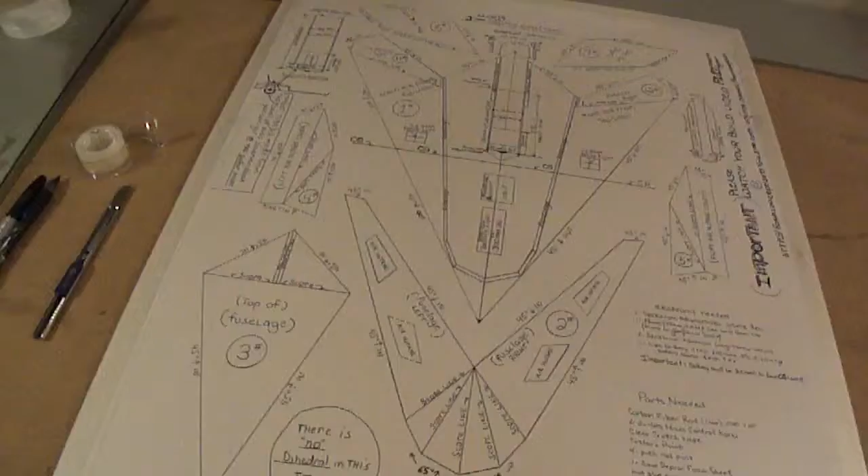Alright you guys, we're going to get busy cutting out our F-117 stealth fighter. You can use a 30mm or 28mm EDF jet.

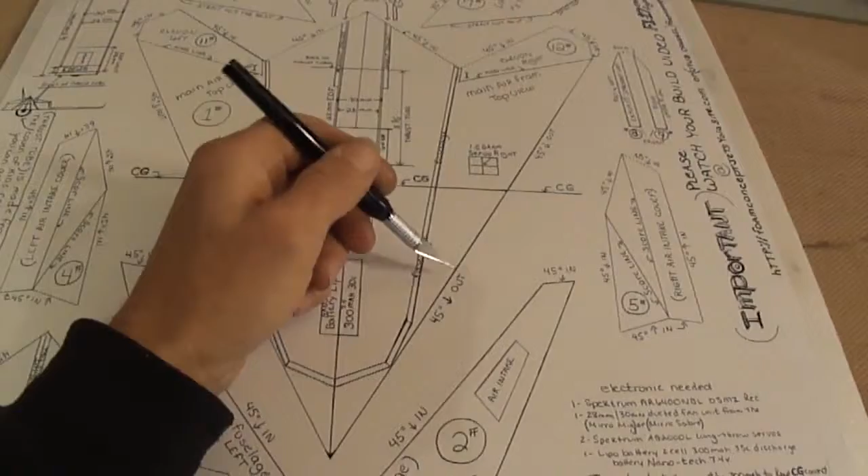I was going to go over a few things, which is I started putting on here '45 cut outward,' meaning you're going to cut on your line that way. And anywhere I've got it marked as '45 in,' that means you cut in. I'll start putting this on all my plans, that way it makes it a little easier for you.

Alright, let's get started. I tape my sheet down on my foam board.

Like I said guys, always use the bow. Put the crown at the top. These sheets come with a little bow in them, so you want the crown at the top. You'll see one side of the sheet is smoother than the other, but I always like to put the crown at the top. It makes the plane, when you build it, give it a better airfoil shape.

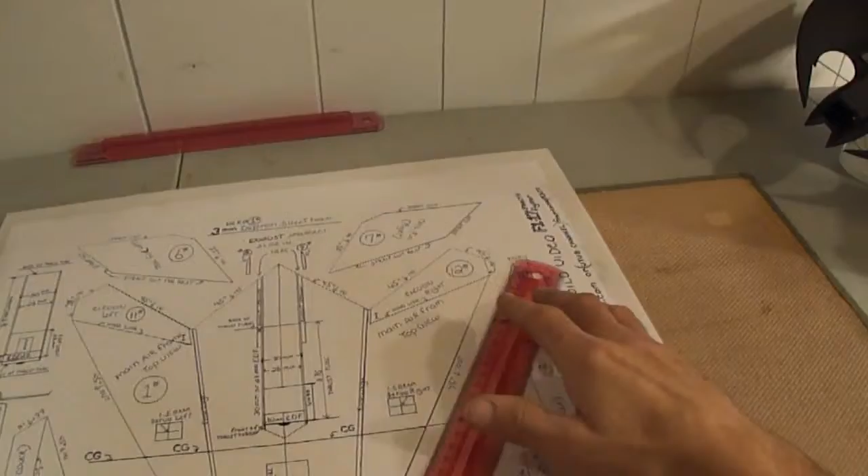Alright, let's start with the main airframe. I'll go ahead and cut this out. As you can see, it's a 45-degree cut with an arrow pointing that way, so we're going to put it on our line.

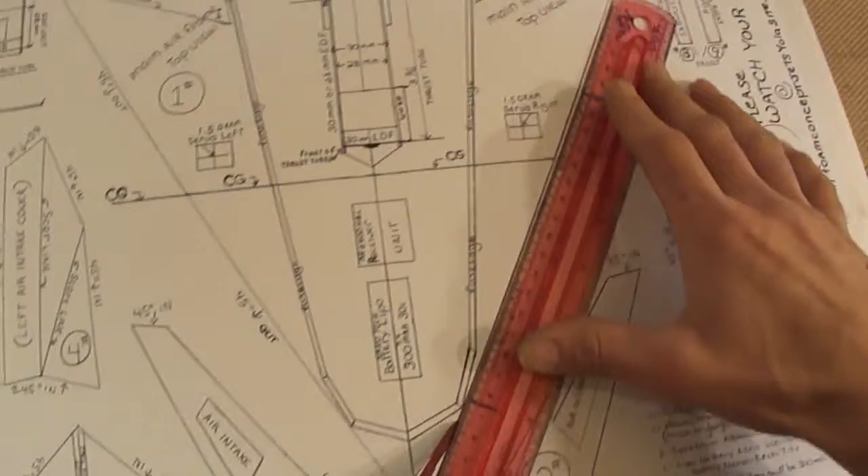Let me get a different knife. I'm going to go ahead and do my 45s on the main airframe first. I numbered all the pieces.

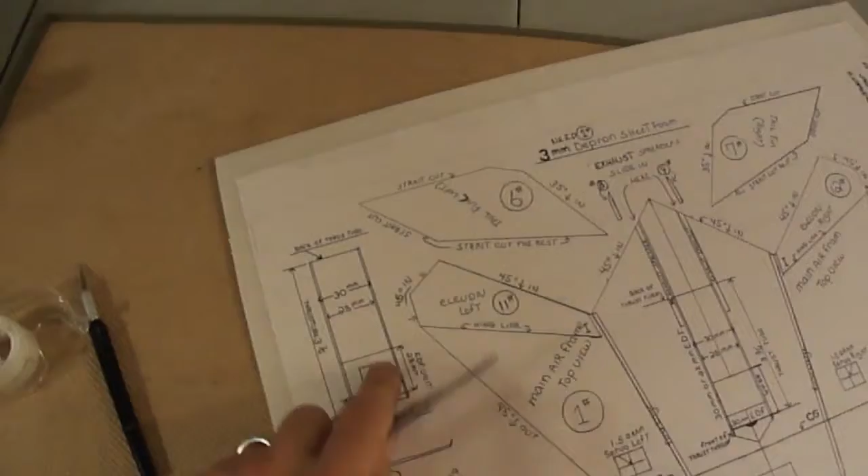I'm going to try to get through this a little quicker than my other videos too. Alright, for your elevons, those are 45 inward.

Turned out to be one cool jet. I love flying it.

Again guys, I'm just doing the 45 with the arrow pointing that way, so I'm cutting 45 in toward the inside of the fuselage, or the main body of the plane.

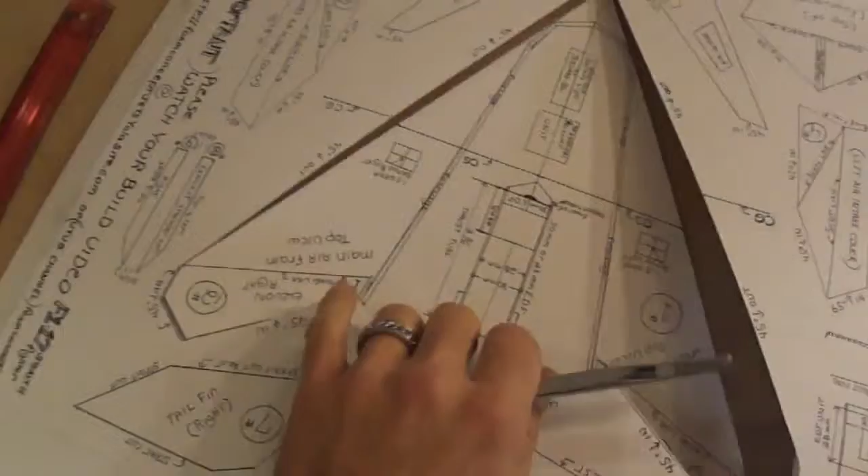Alright, so we cut out our main airframe. Just go ahead and put that off to the side.

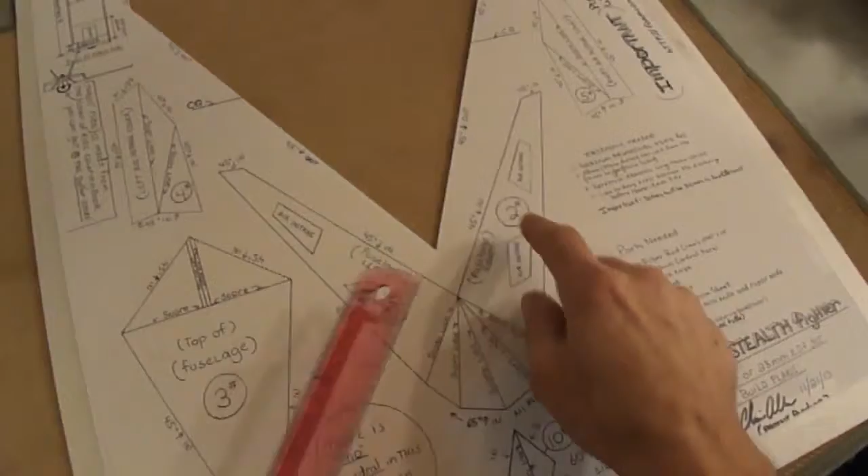We'll move on to piece mark number 2, which is your fuselage. Here we've got a 45-degree cut in toward the piece.

And if you guys want, you can do more than the 45-degree angle on some of these. I even got it marked in some places where there's a 65-degree angle cut. You can make it 70, 75 - kind of the more the better.

In. Right now I'm just working on the main fuselage part.

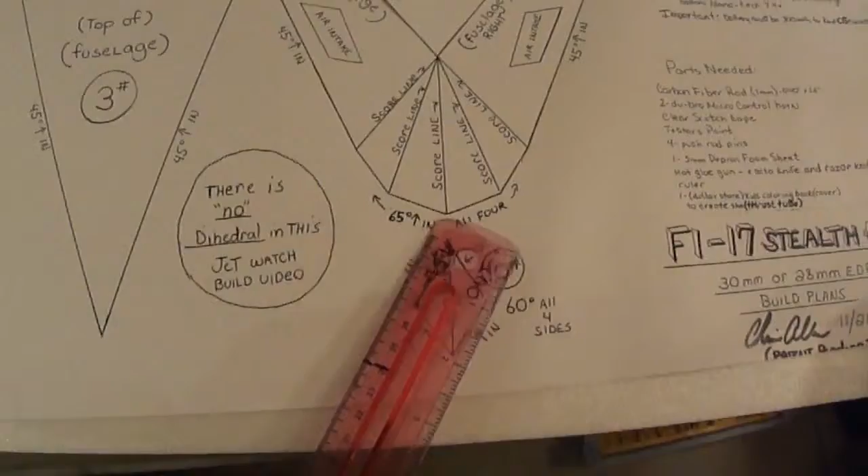Alright, now these are all on the front of your fuselage, which is kind of your canopy front end here. We're going to do 65-degree cuts, all 4 of these, angled inward. Like I said, you can make them a little more too. So if you want to go 70-degree.

Alright, now on these canopy lines here in front of your fuselage, you're just going to want to score them. I would only score about halfway through them too. You don't have to go real deep - just a nice little score is fine.

Again, I'm just scoring all these. You don't want to go all the way through. Don't care about that paper moving - already on it.

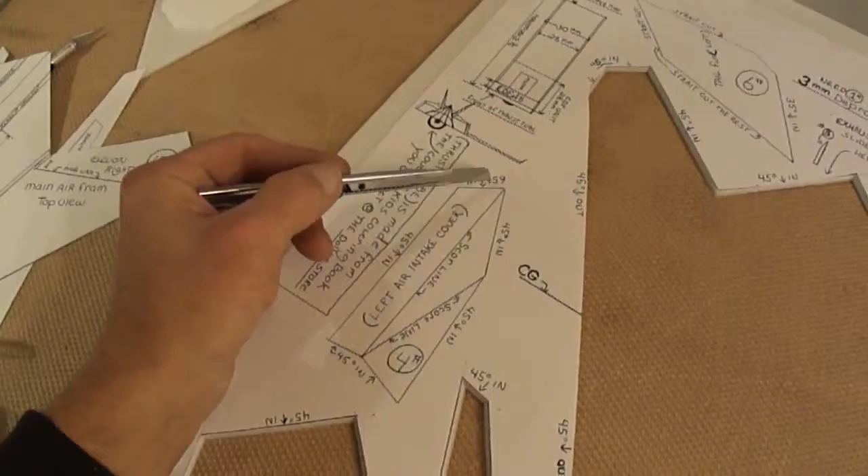For this piece, put our plans to the side here. There's that piece. Alright, let's move on to these left air intake cover. Again, there's some 65-degree cuts on here. I prefer you go more, so if you get like 70 or 75, that's fine. They got to be some nice angles on them.

So these are your air intake covers, that's what I call them anyway. Here's the 65-degree line, I'm going to go ahead and put a lot more, probably like 70, 75 degrees on there. Again, on some of these 45s, if you want to give them a little more, like 50, that's fine. Some 45s there.

Alright, so this is your left intake. I got some lines there that you got to score. Just score across those lines, again just not all the way through, just score them.

I'll get my X-Acto knife. I find an X-Acto knife works good on a lot of this stuff, especially for building the bat wing. It gets right in there on them cuts, and you can be a little more precise with them.

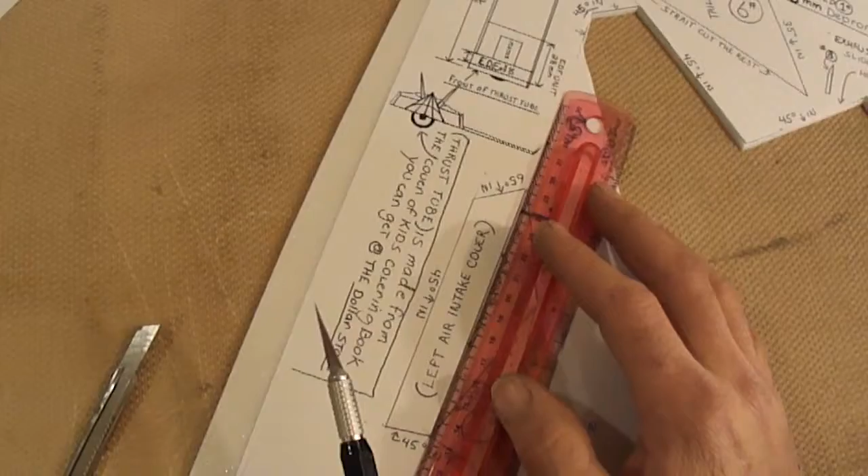So again, I'm just scoring these lines. Oops, I didn't finish my cut. Alright, there we go, there's one intake cover.

Now you can see where I scored my lines in the top of it. I'm going to take and flip this piece over, add a couple of pieces of tape to the back. Again, it's on the back side because you don't want to leave those lines open that you just scored. I just want to add this, make this piece a little stronger from behind here. Now you can take and break them where you scored them.

Try to get this out here so you guys can see. So there we had our top piece, our main airframe. These are going to be our air intakes.

Right, let's do the other side. This is the other, right hand side of the air intake. 45 inward, another 45 inward. Here's the 65, again just do 70 or 75. I really put my blade at an angle on these ones.

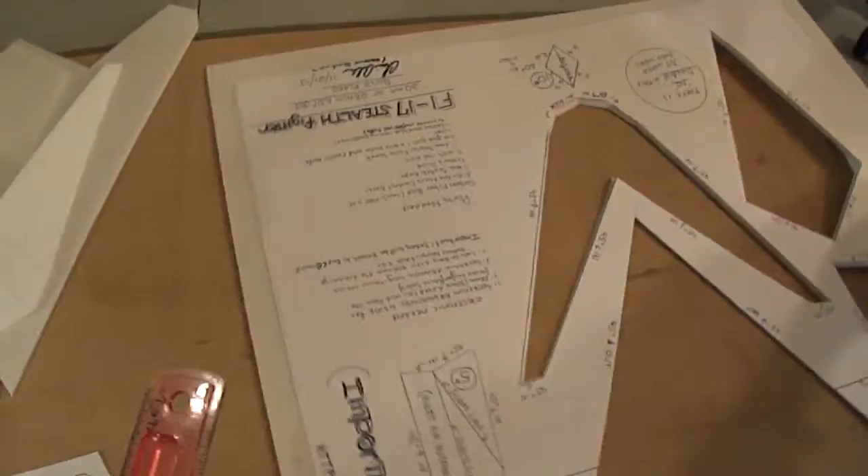And another 45. And another 45 in the front. Get these front pieces 45. Oh, that's right. Again, we're just cutting out the other side of the air intake. There's two of them.

Again, we got to score these lines. I'm going to go ahead and use my X-Acto knife, it's a lot sharper and it does a more precise job.

Again, let's take a... now you can see where this is going to break where I scored it. And you're going to want to take and flip your piece over, put some tape on this back side, keep your piece nice and rigid from the back.

So that way you can fold your piece around and get the shape you want. Alright, moving on to these tail fins.

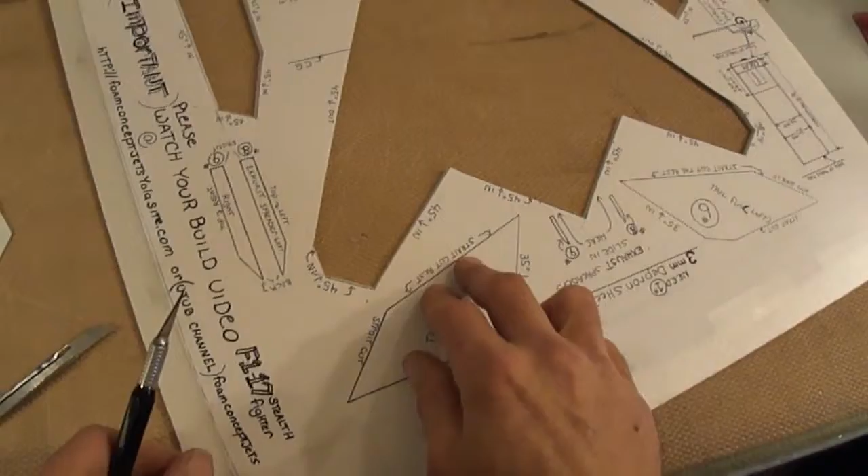Okay, I just straight cut wherever I got straight cut marked, the rest, that means just all the way around the piece. The only ones you want to cut at angles are the ones that are marked. Another straight cut. Here's a 35-degree angle cut on the bottom of these stabilizer fins.

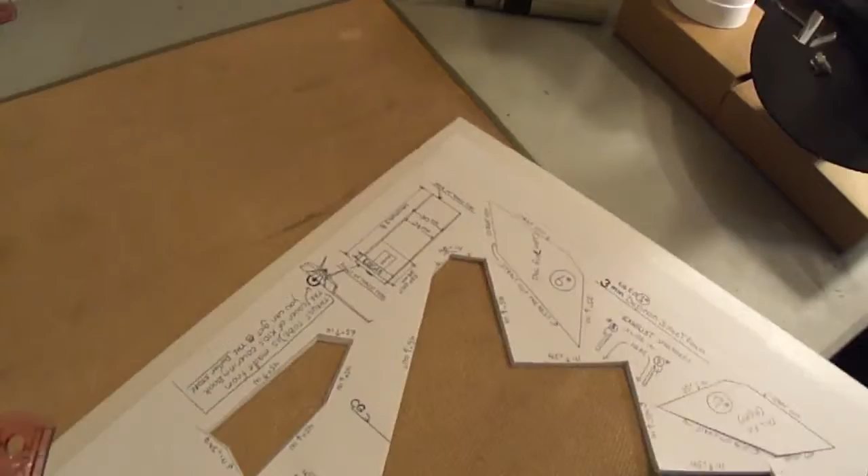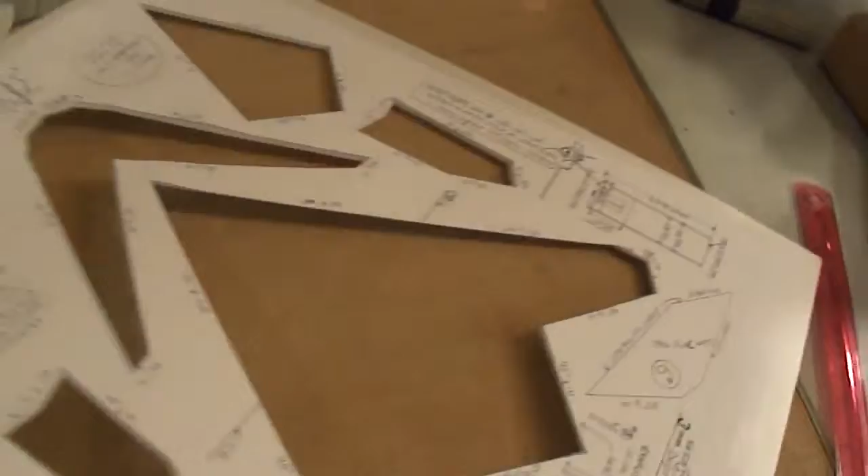If you want them to be angled slightly outward once you install them on your jet, so I'd just go less than 45 on that. Another straight cut in the back. Fin. Knock this other one out.

And the rest are just straight cuts on these tail fins. There's only one 35-degree angle cut on the bottom of them. The rest are all just straight.

Yeah, you guys are going to love flying this jet. It is awesome. Alright, so there we cut out all our pieces.

Main airframe, main fuselage, top of the fuselage, left air intake, right air intake, and then our tail fins. Oh, we got our little exhaust spreaders. They're going to go in the back, slide in through the back of the jet to keep open the exhaust in the back.

I'll just hurry and knock these out real quick. These are just all straight cuts.

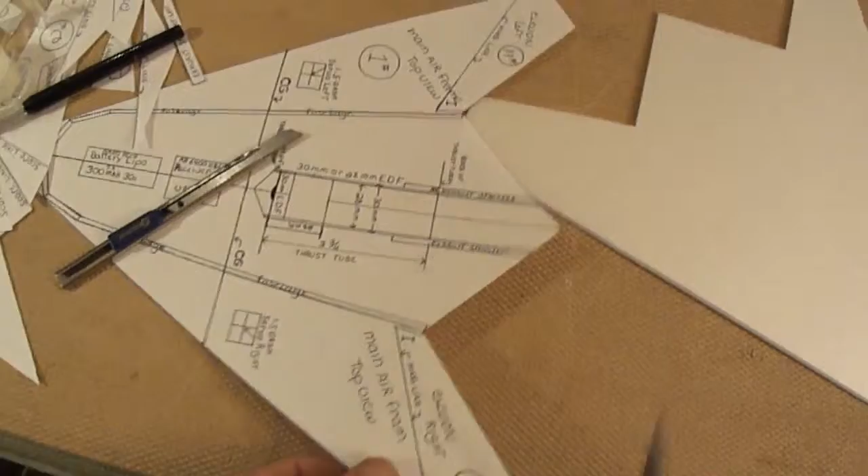Just gonna take and use my scissors. This is a hinge line here for your elevons.

And I'm just going to use one elevon because that's all you really need. Again, you can mark this the top of your airframe.

Because then you know it's got that bow in it. As you can see from the piece being bowed, it's still holding that bow. So I just mark it top.

Take your elevon over here, lay it on there. I just mark my corners. You can use the same one, just flip it over to the other side.

On there nice and match it up. You want your elevons to be the same size. Just marking my corners.

Alright, come back in here with your ruler.

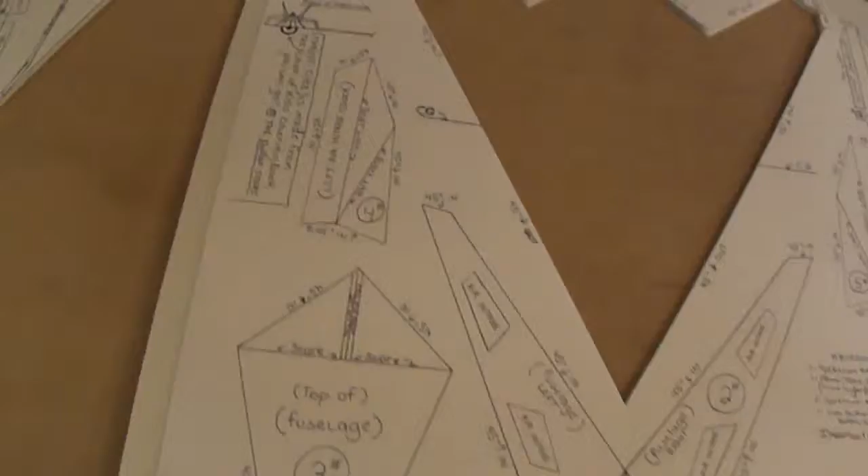So again, I'm just going to attach everything using clear Scotch tape. And if you guys want, you can do more than the 45-degree angle on some of these. I even got it marked in some places where there's a 65-degree angle cut. You can make it 70, 75. Kind of the more the better.

Right now I'm just working on the main fuselage part.

Alright you guys, we're going to get busy cutting out our F-117 stealth fighter. You can use 30mm or 28mm EDF jet.

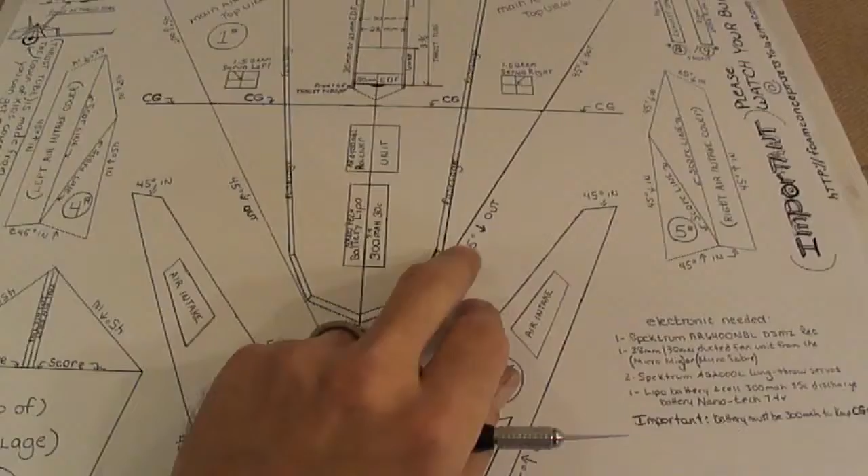I was going to go over a few things. I started putting on here '45 cut outward,' meaning you're going to go on your line that way. And anywhere I got it, you'll see '45 in,' that means you cut in. I'll start putting this on all my plans, that way it makes it a little easier for you.

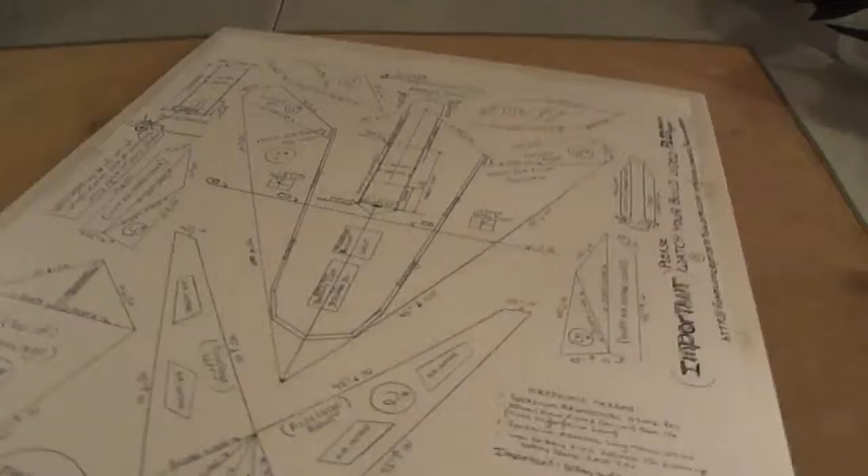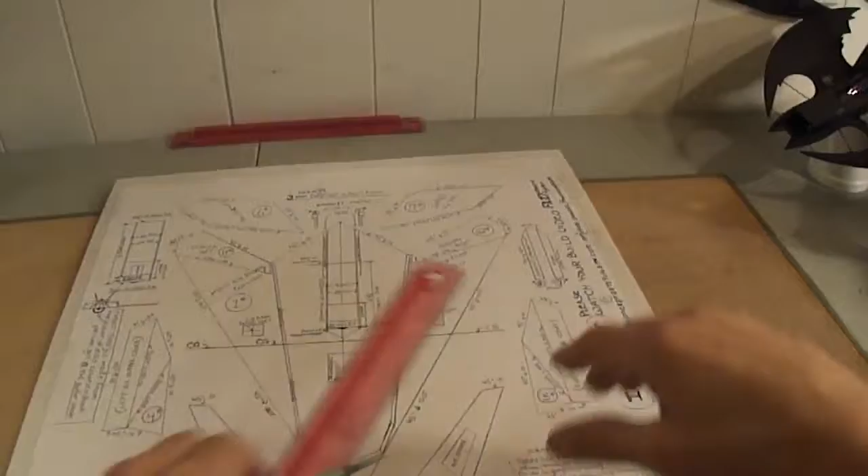But alright, let's get started. I taped my sheet down on my foam board. And like I said guys, always use the bow, put the crown at the top. These sheets come with a little bow in them, so you want the crown at the top. You'll see one side of the sheet is smoother than the other, but I always like to put the crown at the top. It makes the plane, when you build it, give it a better airfoil shape.

Alright, let's start with the main airframe. I'll go ahead and cut this out. As you can see, it's a 45-degree cut.

Alright, now these are all on your front of your fuselage, which is kind of your canopy front end here. We're going to do 65-degree cuts, all four of these angled inward. Like I said, you can make them a little more too, kind of the more the better. So if you want to go 70 degree...

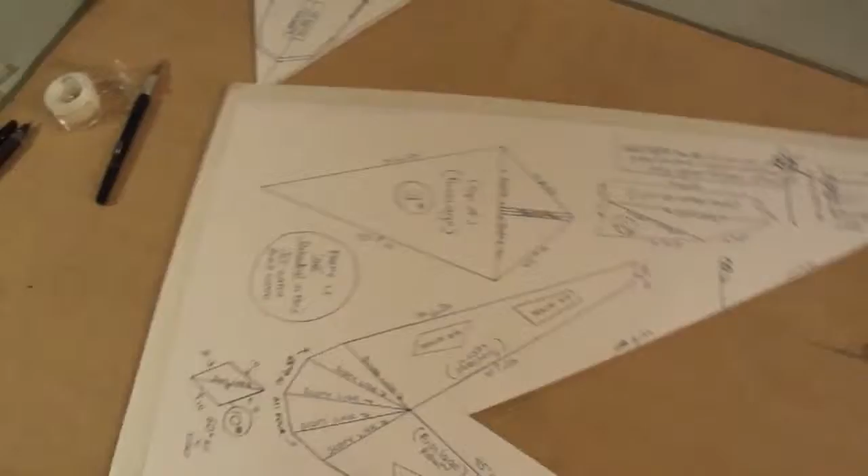Alright, now on these canopy lines here in front of your fuselage, you're just going to want to score them. I would only score about halfway through them too, you don't have to go real deep. Just a nice little score is fine.

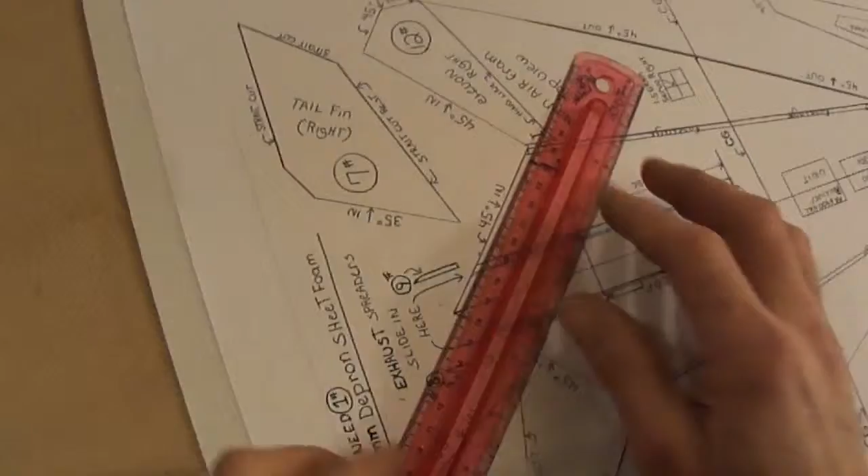Again guys, I'm just doing the 45 with the arrow pointing that way, so I'm 45 in it toward the inside of the fuselage, or the main body of the plane.

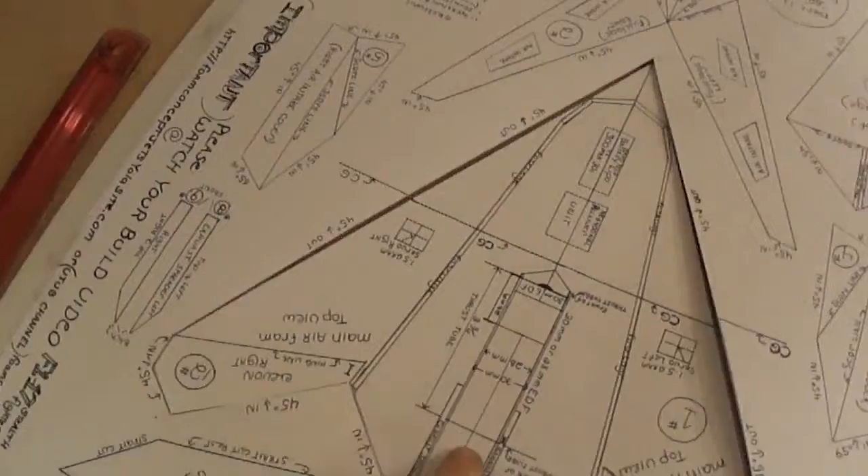Get them all. Alright, so we cut out our main airframe. Just go ahead and put that off to the side.

We'll move on to piece mark number 2, which is your fuselage. Here we got a 45-degree cut in toward the piece with an arrow pointing that way, so we're going to put it on our line.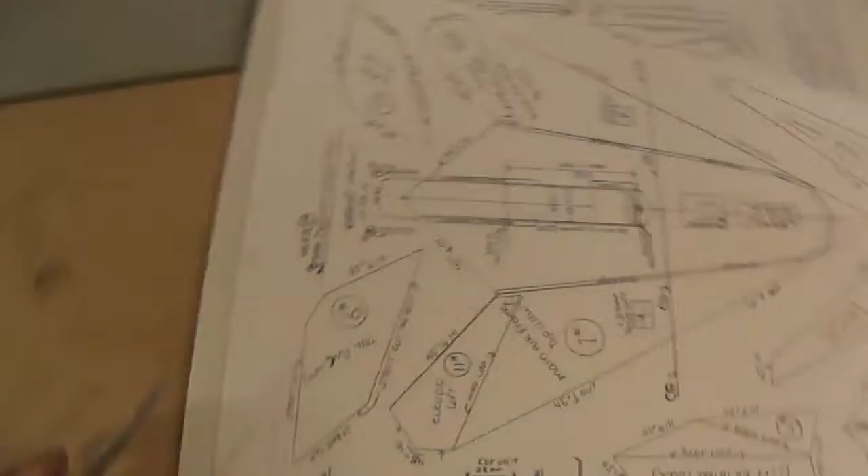Let me get a different knife. I'm just going to go ahead and do my 45s on the main airframe first. I numbered all the pieces. I'm going to try to get through this a little quicker than my other videos too. Alright, for your elevons, those are 45 inward.

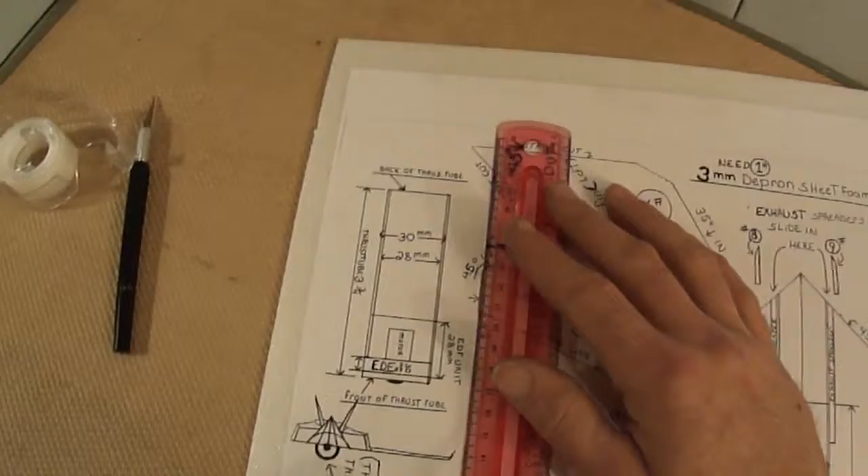Turned out to be one cool jet. I love flying it.